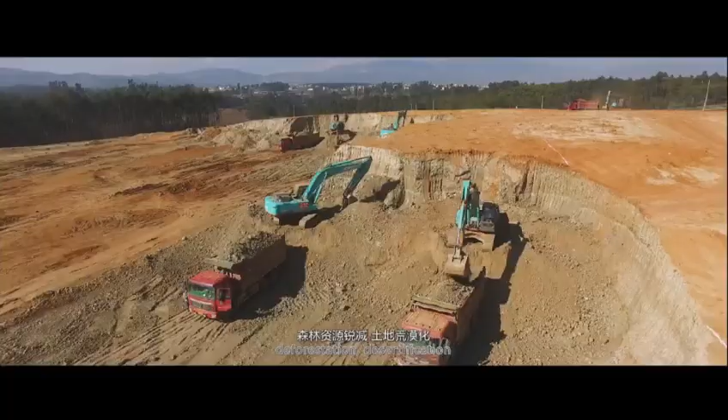Earth is humanity's sole habitat, and for all the wonders and miracles that mankind have created, humans have brought much harm to our planet, such as global warming, ozone layer depletion, acid rain, freshwater and energy shortages, deforestation, desertification, massive and rapid species extinctions, and pollution caused by toxic chemicals.

With the rapid urbanization in China, traditional townships have gradually given way to new development. As urbanization continues to progress, and with rapid economic development, output of urban and rural household waste has increased tremendously. All types of waste cause destruction to urban and rural ecological environments and quality of life, polluting living environments and occupying a great deal of land.

According to official data, a small city of 1 million population generates thousands of tons of household waste a day. If all waste is not properly disposed of or treated, we'll be forced to live in a world of filth. The entire environment will be besieged by waste. Air, water, and land will become increasingly polluted.

Currently, there are three ways of treating waste: landfill, incineration, and the most damaging, illegal dumping. How do we dispose of this growing mountain of waste and trash? How should we handle solid waste from urban and rural areas? These have become pressing environmental issues.

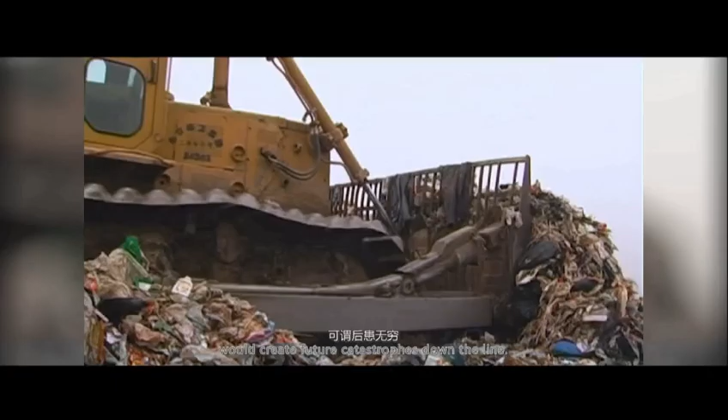Urban household waste disposal began in the early 1980s. Due to the conditions at that time, waste could only be disposed of by landfill. But this method of waste disposal would create future catastrophes down the line. Waste disposal not only occupied considerable masses of land, but also caused contamination of underground water.

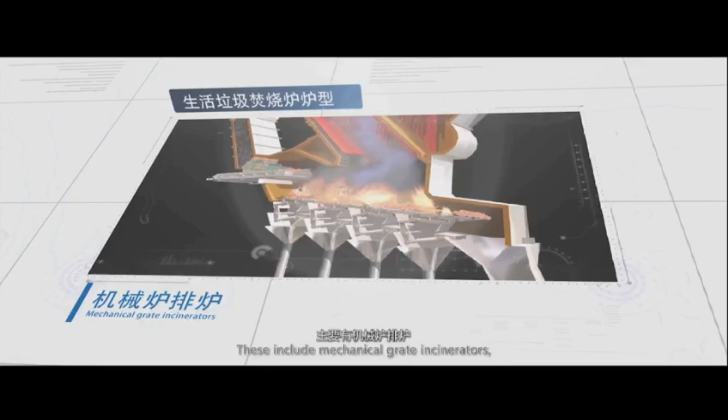Incinerators are in use across China and around the world. These include mechanical grate incinerators, fluidized bed incinerators, pyrolytic incinerators, and other types such as vertical incinerators.

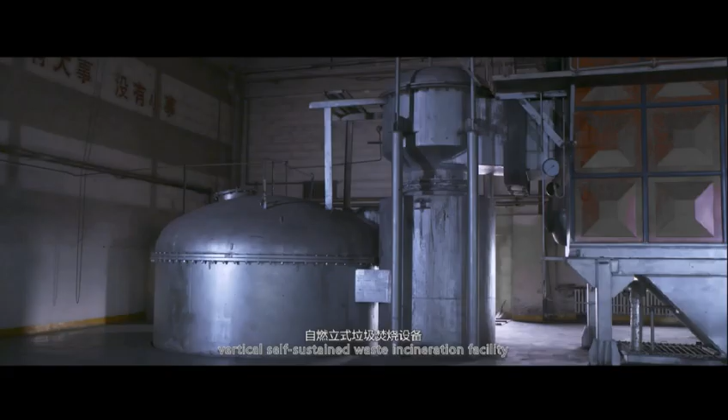Chitang Environmental Protection Company is a Chinese company specializing in waste incineration disposal, with support of advanced imported technologies and in-house research and development. Chitang has developed a 6th generation SLC type vertical self-sustained waste incineration facility, which is most suitable for small and medium-sized towns and cities.

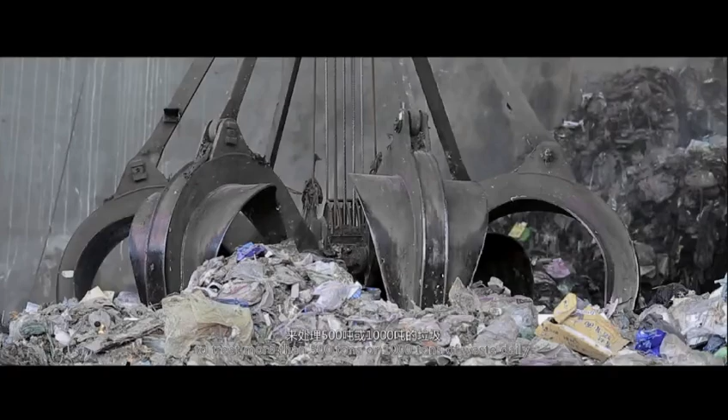Not every town or city requires a large incinerator to treat more than 500 tons or 1,000 tons of waste daily. Chitang has the following competitive edge.

This waste incinerator features a compact size, low investment and operation costs, high levels of adaptability, easy maintenance, and complete incineration. No added fuel is required. During the incineration process, waste leachate is recycled into the incinerator and is burned with no discharge required.

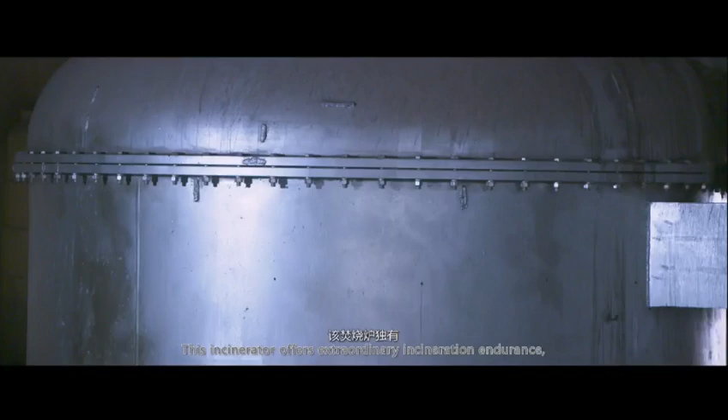Chitang's superior technology has attracted attention across the country. This incinerator offers extraordinary incineration endurance with 168-hour continuous operation.

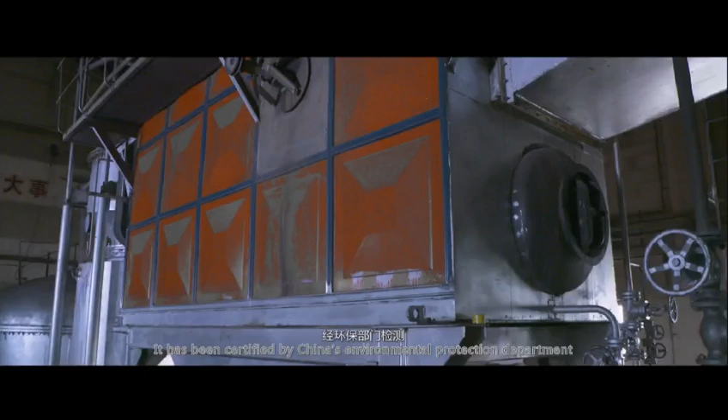Incineration performance is one of the most eye-catching features. It has been certified by China's Environmental Protection Department and meets flue gas emission levels more stringent than China's GB 18485-2014 environmental standards.

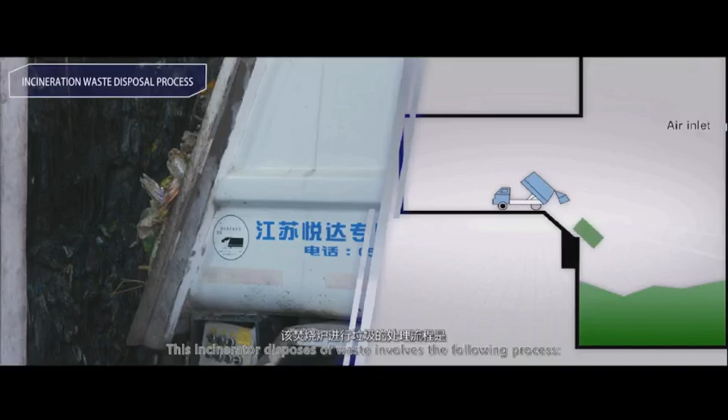This incinerator's waste disposal process involves the following steps. After urban household waste is transported to the waste treatment plant by a dedicated vehicle, the landfill leachate is disposed of through the collection system. The waste is then stored in the waste pit.

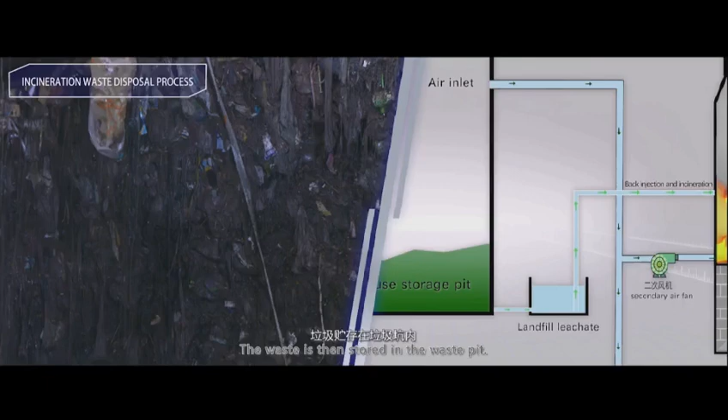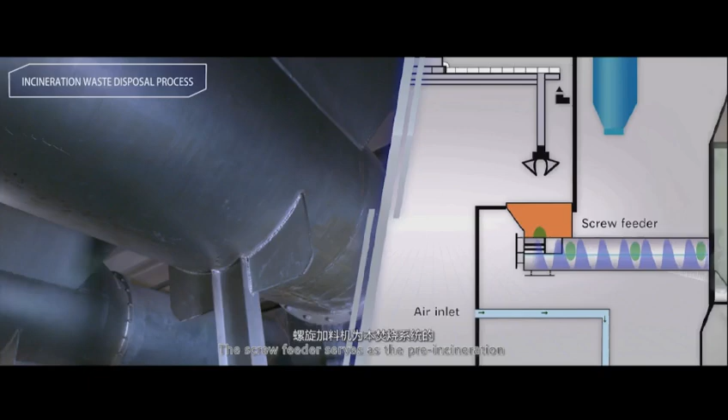After being processed through the screw feeder, waste is then transferred to the incinerator uniformly, continuously, and in multiples. The screw feeder serves as the pre-incineration disposal unit of the incineration system. It dries, transports, and evenly mixes the waste to prepare it for incineration, so that waste can be transferred into the incinerator smoothly, thoroughly, and rapidly burn to fully meet local disposal demand.

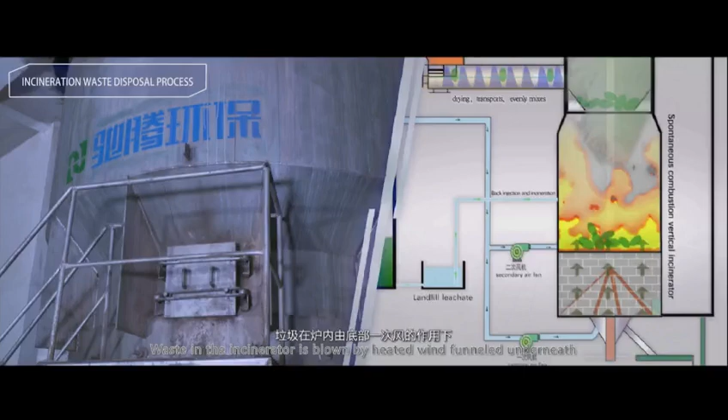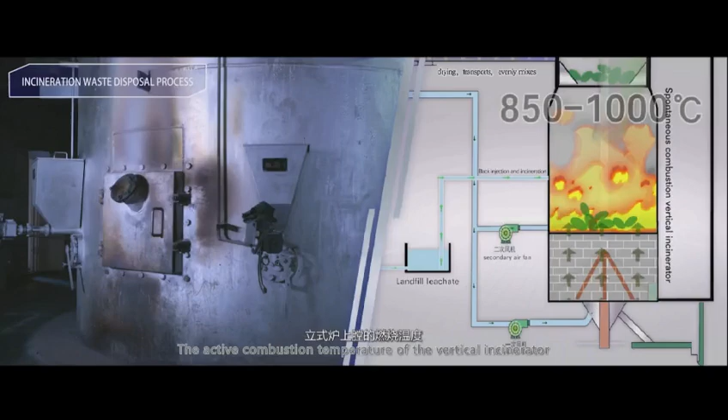Waste in the incinerator is blown by heated wind, funneled underneath, and uses the waste's intrinsic properties as fuel to fully burn them. The active combustion temperature of the vertical incinerator reaches up to 850 to 1000 degrees, ensuring that the waste is fully burned, while effectively curbing the generation of dioxins.

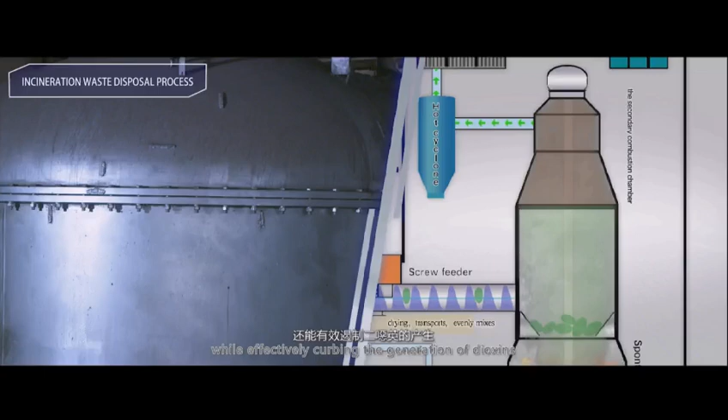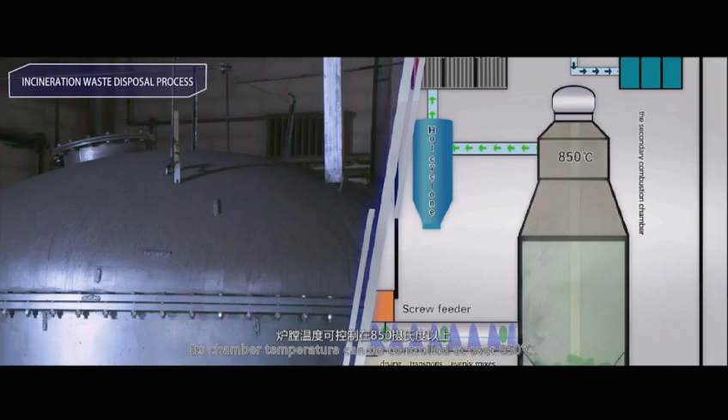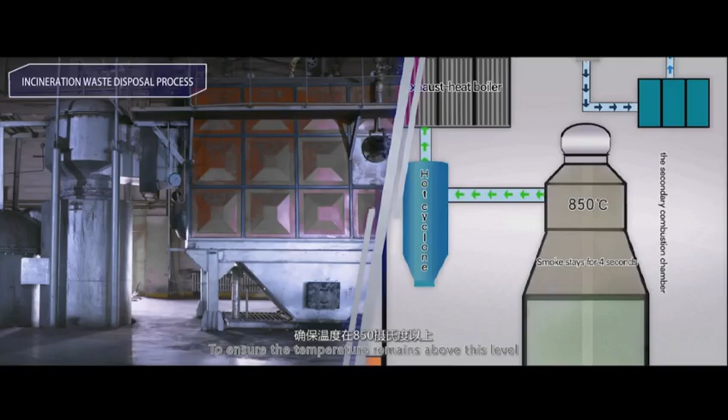Flue gas then enters the secondary combustion chamber in the upper incinerator section. This chamber is a special heat storage device. Its chamber temperature can be controlled at over 850 degrees. The flue gas is retained for at least 4 seconds, twice as long as the 2-second national standard. When its temperature falls below 850 degrees, the flue gas releases stored heat to ensure the temperature remains above this level so that harmful substances can be fully decomposed.

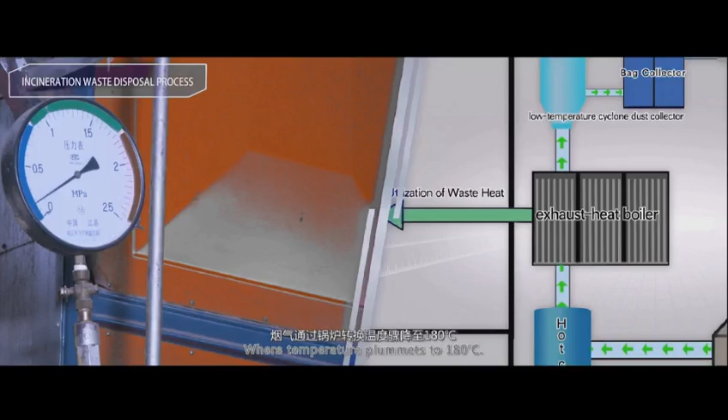High-temperature flue gas enters the exhaust heat boiler, where temperature plummets to 180 degrees. After leaving the exhaust heat boiler, the flue gas enters the secondary low-temperature cyclone dust collector and is rotated at high speed to collect particulate matter via centrifugal force.

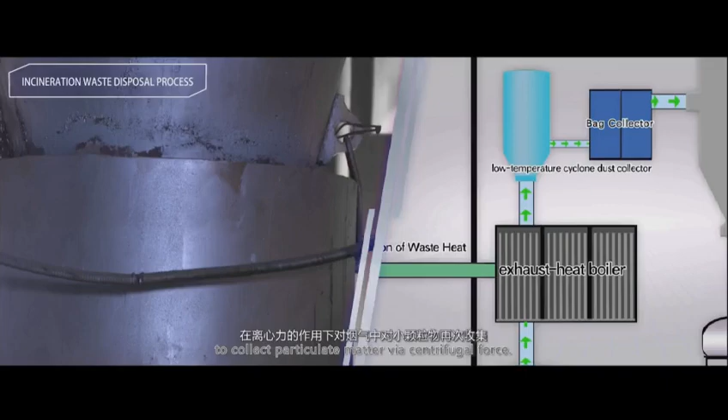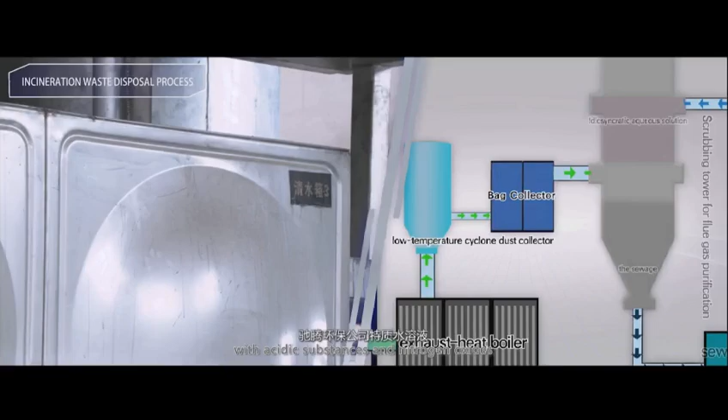The flue gas then enters a bag room, where internal particles and absorbents capture and collect the particulate matter in order to purify the final exhaust. After leaving the bag compartment, the flue gas enters a washing tower with acidic substances and nitrogen oxides and neutralizes the gas with an aqueous solution specially made by Cheetah.

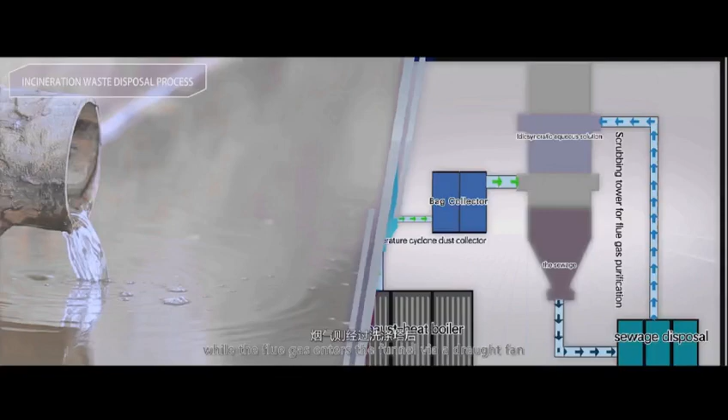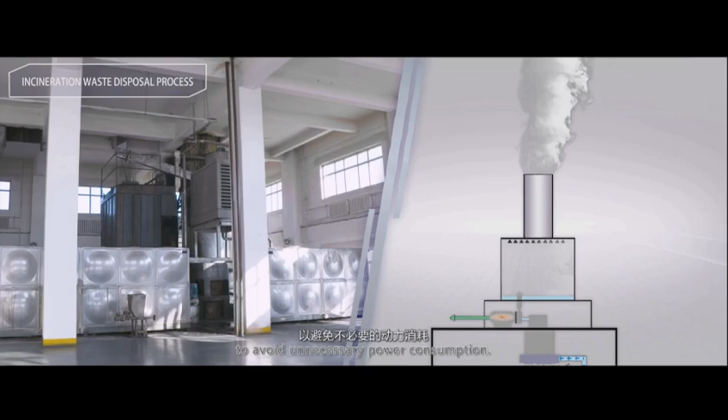All generated wastewater is later recycled, while the flue gas enters the funnel via a draught fan. After being cleaned in the washing tower, when the negative pressure inside the incinerator is very high, the draught fan slows down to avoid unnecessary power consumption.

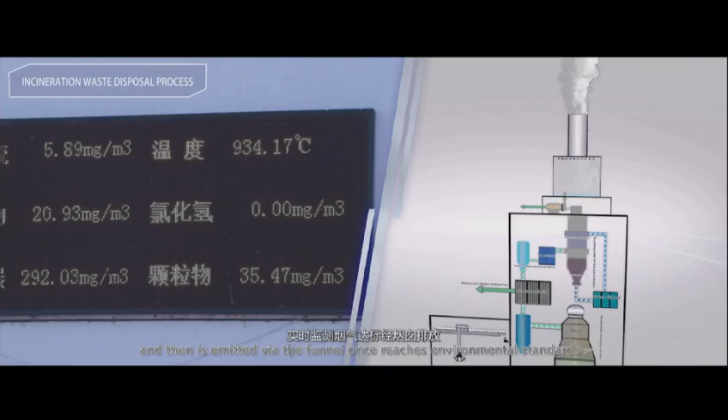After going through the above purification system, the flue gas is monitored online in real time and then is emitted via the funnel once it reaches environmental standards. The steam generated from the burned waste can be used for power generation.

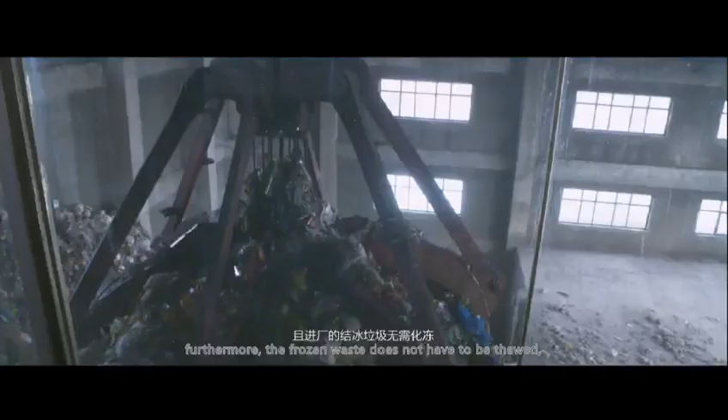In extreme weather regions, the exhaust heat boiler can provide sufficient heating for the entire factory, preventing the landfill leachate from freezing. Furthermore, the frozen waste does not have to be thawed. It only needs to be broken into smaller parcels using the grab when being fed in by crane.

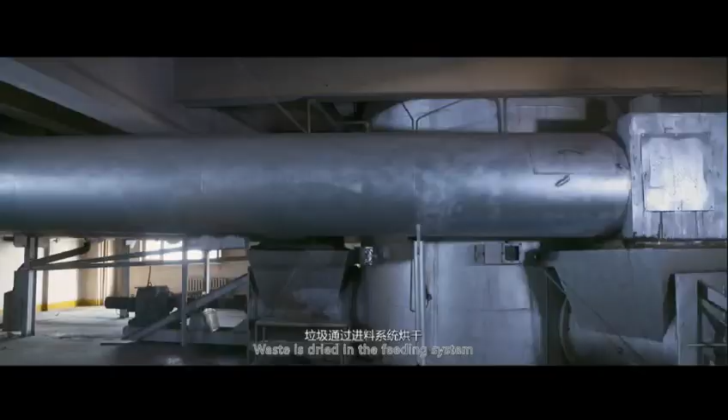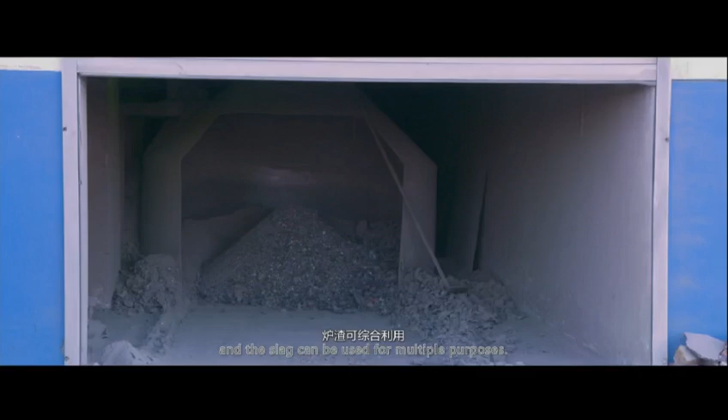Waste is dried in the feeding system and then moves into the incinerator for rapid burning. The incinerator is equipped with a slag discharge system, and the slag can be used for multiple purposes. After being calcined at high temperature, slag can be made into eco-friendly hollow bricks for pedestrian walkways or many other kinds of outdoor building materials.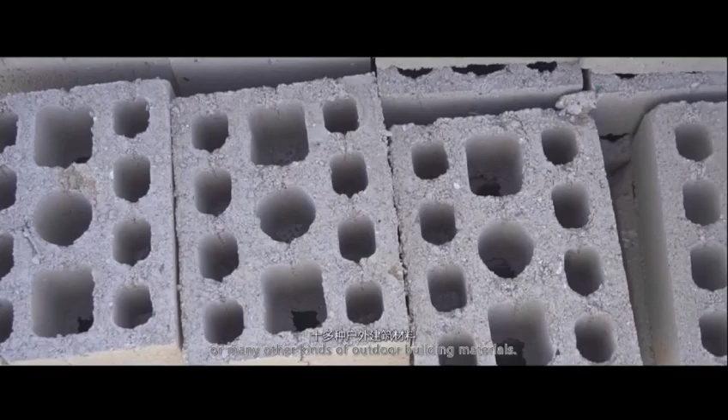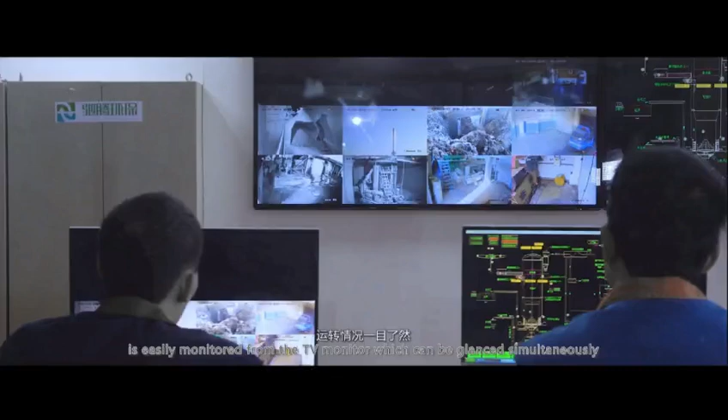The whole process is operated from the central control room. Every process of the waste incinerator is easily monitored from the TV monitor, which can be glanced at simultaneously, and the entire operations are easy to manage with ease.

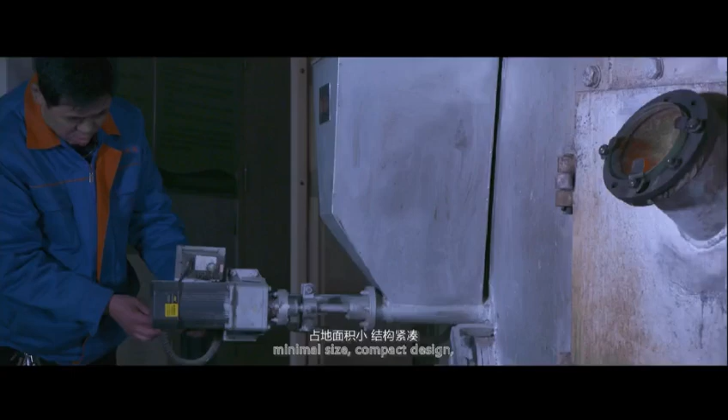This incinerator's most striking feature is a simple structure, minimal size, compact design, and low number of moving mechanical parts, ensuring stable and reliable operations. The system is effectively airtight, leak-proof, and free from environmental pollution.

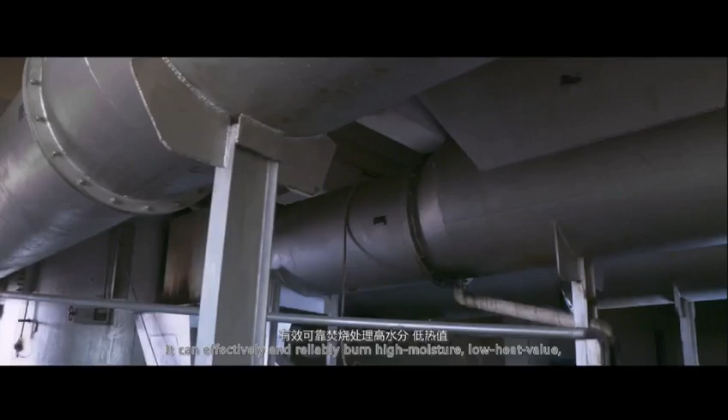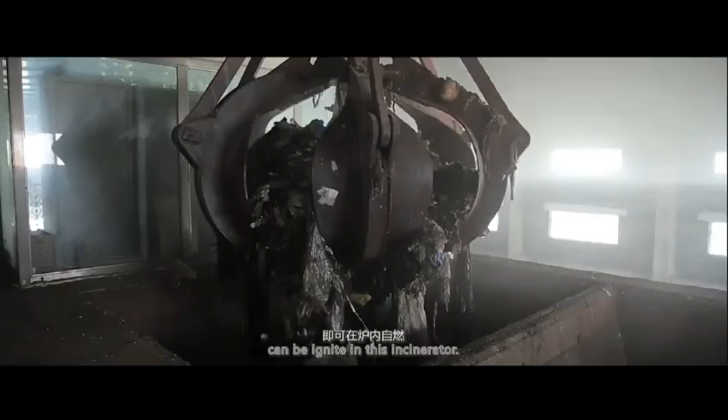With no need for added fuel, it can effectively and reliably burn high moisture, low heat value, mixed and unseparated solid household waste, even waste with a moisture content of 40 to 50%, and a heat value of only 800 calories per kilogram can be ignited in this incinerator. The whole system makes effective use of heat energy.

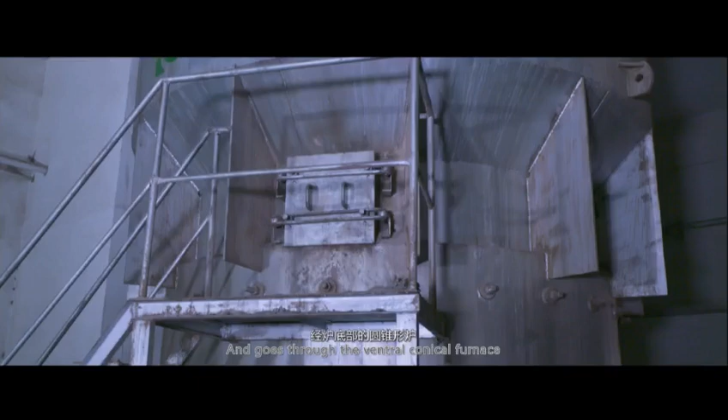Oxidizing air is fed into the incinerator at the bottom and goes through the ventral conical furnace before spreading to the slag layer. This cools the slag while raising the temperature. After leaving the slag layer, it enters the combustion chamber, where the air temperature is 400 to 500 degrees.

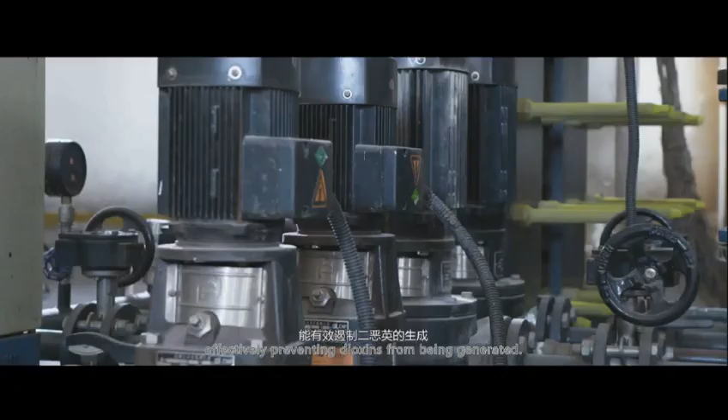Thus, in the combustion chamber, waste is fully and rapidly burned. The chamber temperature is maintained at over 850 degrees. High-temperature flue gas is retained in the incinerator for over 4 seconds, effectively preventing dioxins from being generated. After undergoing deacidification and desulfurization, the flue gas can be discharged.

Free of toxic pollutants, with low investment cost and limited personnel headcount, supported by highly automated operations, this facility is both economical and practical. The 6th generation SLC type vertical self-sustained incinerator is ready to play an influential role in the governance of the environmental arena.